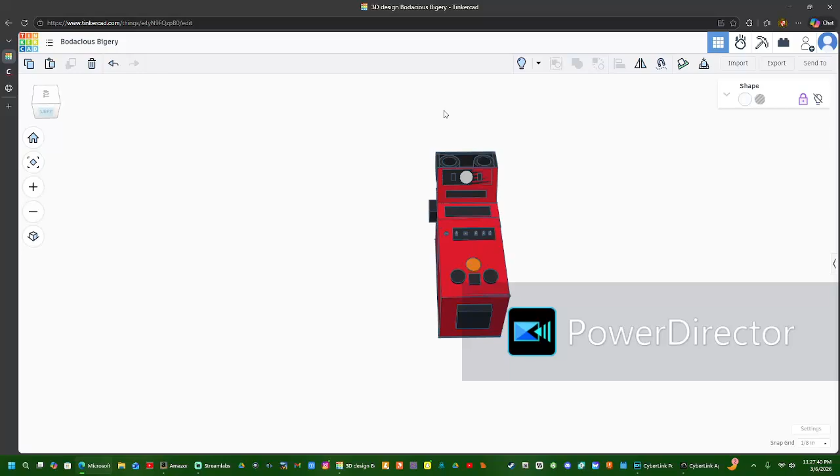Okay, this here is the first look at my center console that I am going to custom build. We're about to take you through how the setup is going to be.

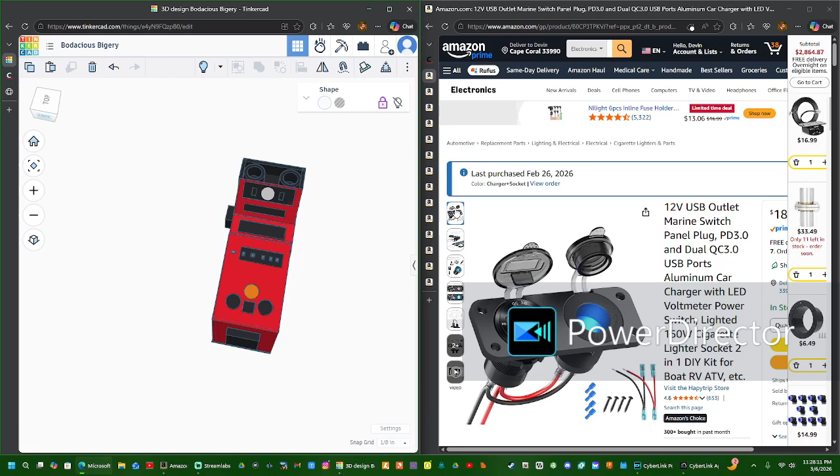Now, this right here is going to be the USB ports and cigarette lighter, every vehicle has one. It's gonna be put right here.

Next thing on the list, this whole thing is going to be wrapped in vinyl liner with black and red leather stitching. It's gonna look real nice. The whole thing is gonna be wrapped in it.

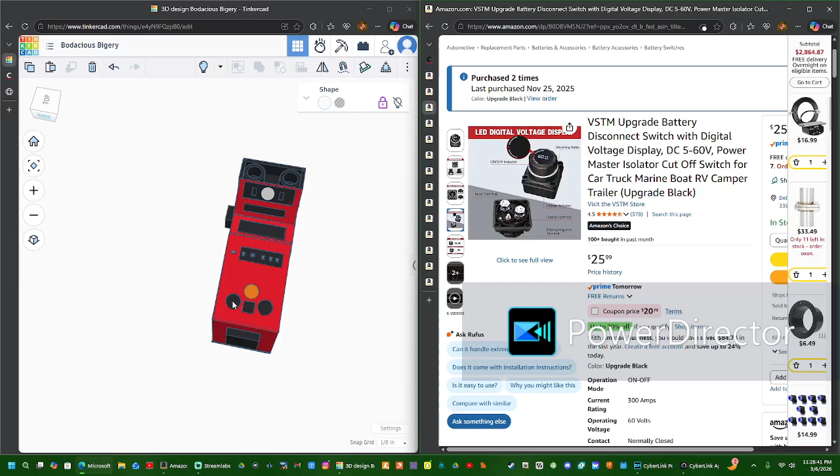Next thing is battery cutoff switches. I have two of these for primary and secondary battery. Primary battery, secondary battery, cutoff switch.

Next up on the list is a key, that's going to be this guy right here. The key switch is going to turn on this whole control panel, and it's going to turn on the battery isolator. It's going to turn on the PSI gauges, all the PSI gauges and everything like that.

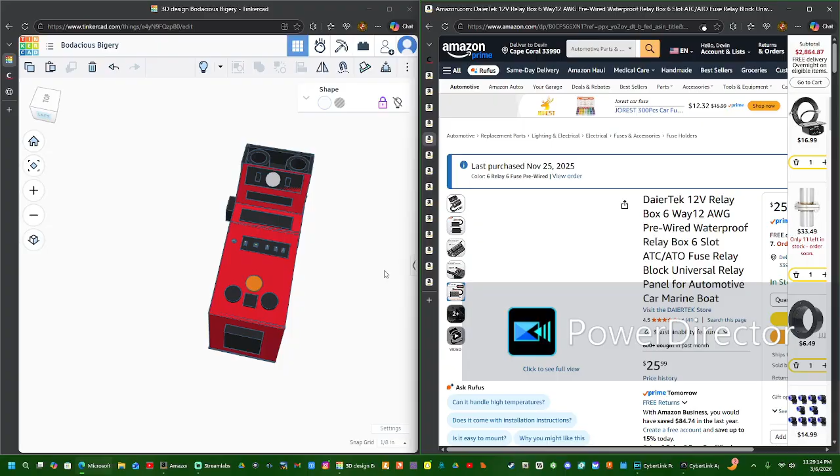Next up on the list, this right here is the fuse box that's basically going to run this whole system, this panel right here. So you flip the switch on after you've already turned the key, and then you're good to start the truck. But first, the factory key has to be in the ignition and turn over.

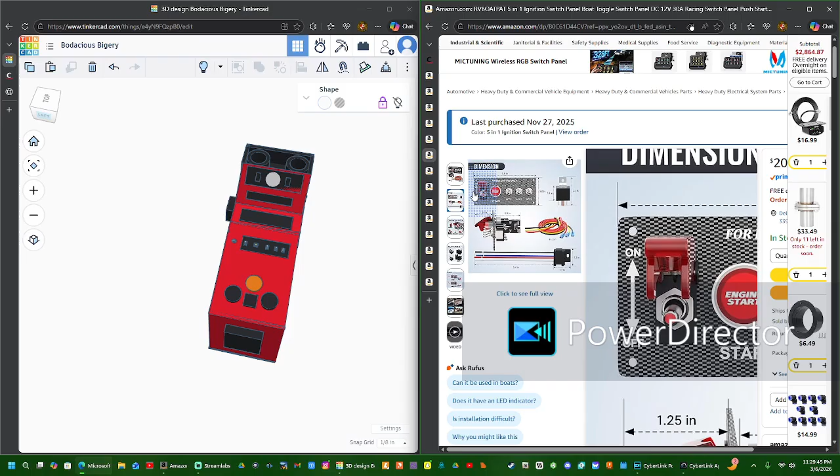You cannot start it with the factory key, but it has to be in the ignition and you have to turn it over. And this key here has to also be on, or the truck will not start. And then this right here is going to be for my drain valve for tank 1, tank 2, and then my transfer pump. And that is, these guys right here, and that's the push to start button there.

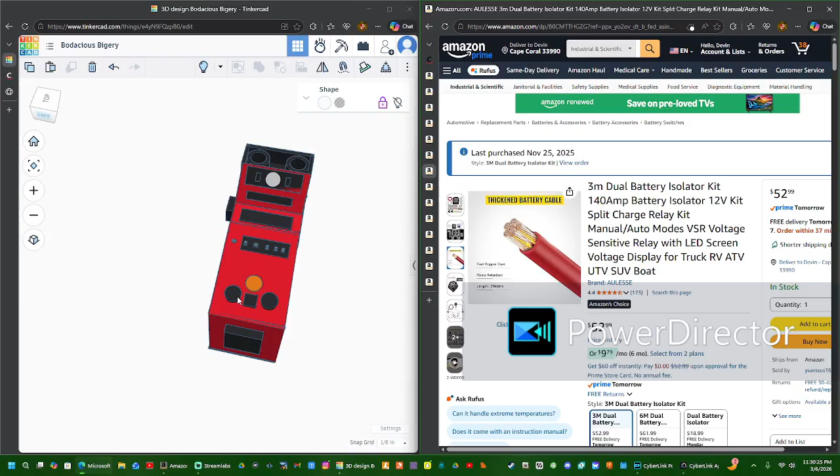So next up, we have the battery isolator. It's going to be hooked up to these two battery cutoff switches here. So when the battery turns on, it will send power to this. And then if this is on, it will then send power to that battery. It will isolate the battery and control the voltage level, preventing the battery from being overcharged or too undercharged.

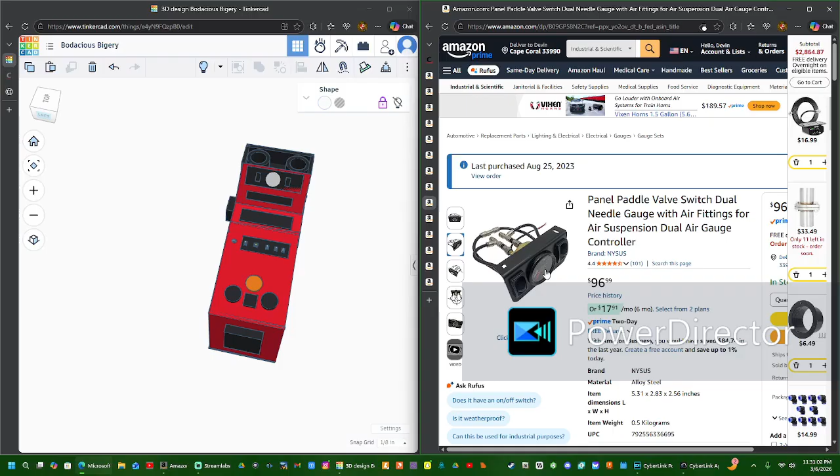Next up on the list is bag control unit. This guy right here sits right here. Front airbags, rear airbags, two different PSI gauges, and it lights up. So when you flip this switch, it will light up.

Next up on the list, I honestly didn't buy this actually, it came with my winch. So I'm just gonna stick with it, use it. Don't need nothing fancy for the winch, cause I already have everything else that tells me the voltage, everything else, and that guy's gonna be right there to turn on the winch.

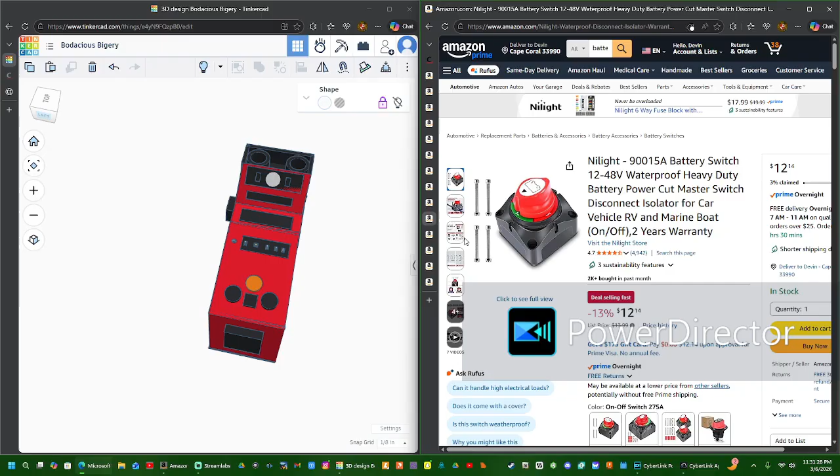Right here is going to be the bass level knob, and that guy's gonna sit right there on the driver's side, as far up as possible so my hip or my leg don't bump it.

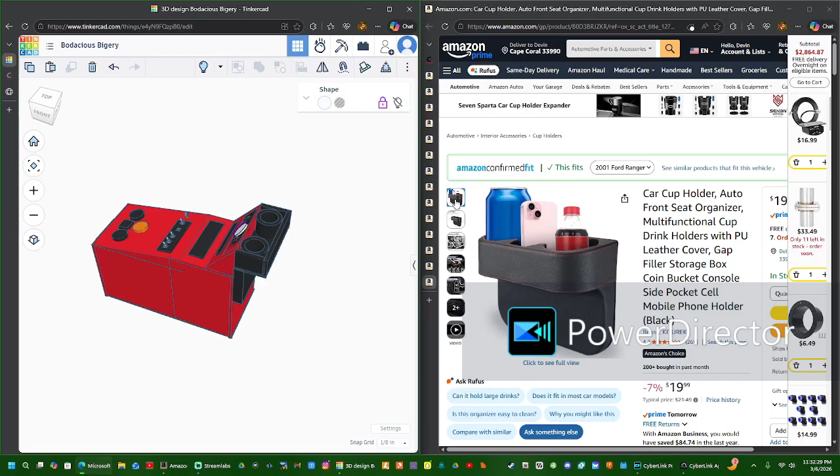Next up on the list, cup holder. This right here is gonna be stationed on the front right here, and it's gonna look real nice because the whole center console is gonna be wrapped in that black and red diamond stitched leather, which is also water and stain resistant or repellent. It's gonna be fully custom built.

Wires are gonna be running through the floor this way, out the back of the cab, to where it needs to go, and then wires can be running this way through the floor, up through the firewall to the primary battery and everything like that.

Here is an amplifier. I don't need to show you guys a picture of that. If you don't know what an amplifier is, go read a book. That is my center console control unit.

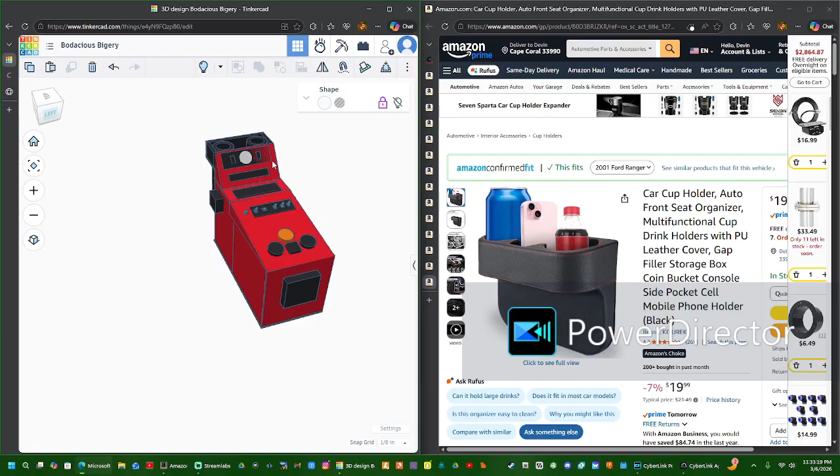And I'm gonna be building it hopefully by tomorrow, if I get to it. I still have a lot of work to do. I still have to rip the seats out, pull up the carpet, and run wires through it.

So when I install it, everything is gonna be plug and play.

I've thought about this for months. I've never wrote it on paper or anything like that, and I just keep thinking about it, thinking how I'm gonna wire things up, see how things are gonna work, everything else like this.

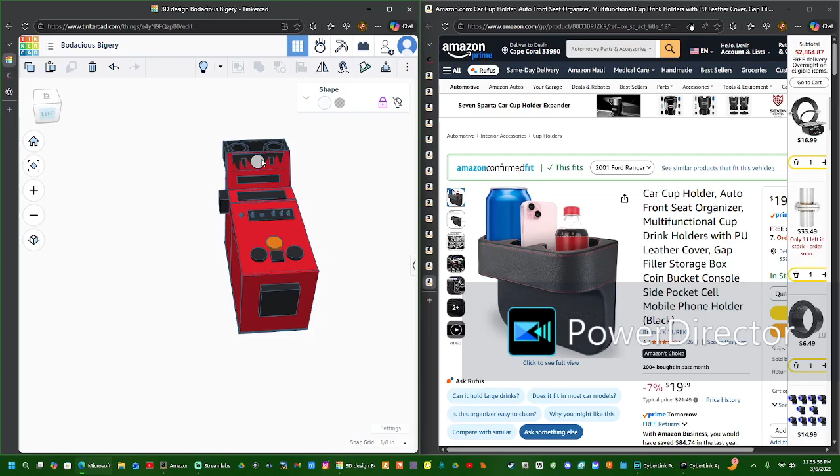And this right here, this is the best setup for what I'm doing. Obviously, everything's gonna be a little bit different.

Everything's not exact size. One last thing is that this whole unit right here that's on angle, it's gonna be on hinges, so you're gonna be able to flip this whole thing up like that.

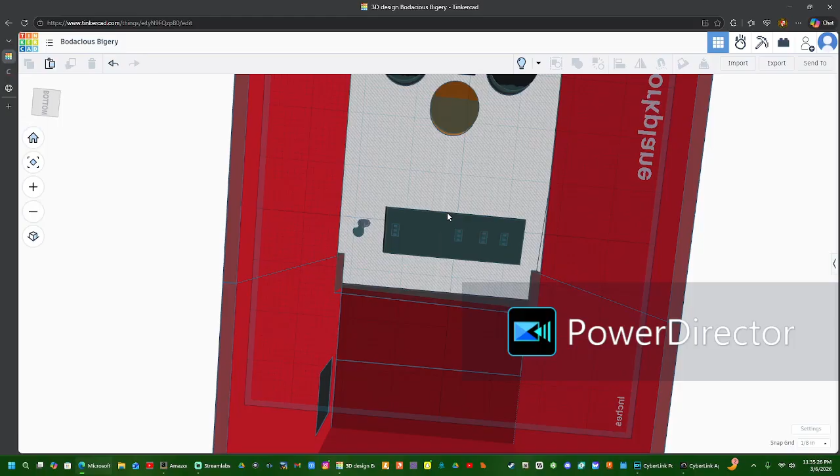And also all the cables and everything, this right here is the lid that's going to lift up. There's gonna be hinges right here, and then all the cables are gonna run through here, down here, through underneath, and then underneath the carpet in the truck.

So then before I put the fabric on there and stuff, I'm gonna pre-drill holes in it for all my switches and everything like that, and also for the zip ties, so when I go to install everything, I have somewhere to put zip ties and do cable management.

I've worked five consecutive days, almost 13, 14 hours straight, working on the truck, getting everything ready for this. And I've thought about this since last year in October.

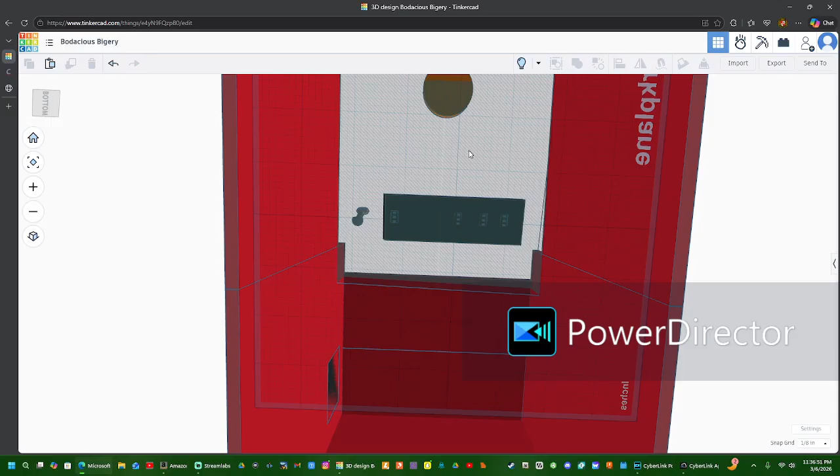And now my crazy ideas are slowly coming to life, and it's gonna be great. I hope you guys stay for the ride because it's gonna be a rough one, but we're gonna get the job done. And remember, stay country.